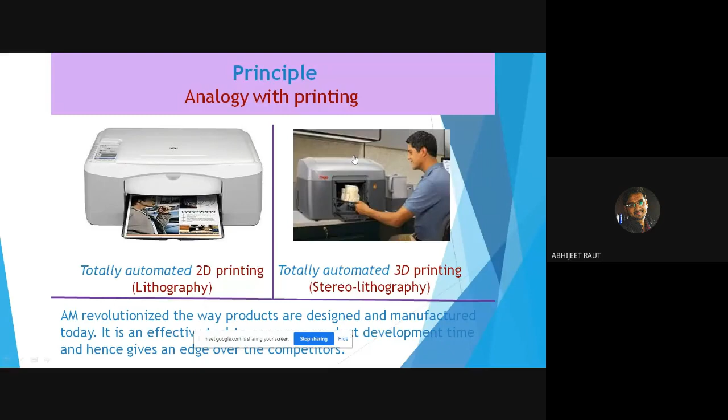But in 3D printing, we create the geometry in three dimensions. Hopefully you have seen a 3D movie in theaters. So we create the geometry in three-dimensional form on computer, same as in 2D printing, and there are machines like this printer which give the output in three-dimensional form. That's the analogy; that's why it is known as a 3D printer. A 2D printer gives output in 2D form, and this in three-dimensional form. In layman's language, that is the distinction.

3D printing or additive manufacturing has various names which you should know, because most of the faculty are from academia and research. If you are referring to papers or articles, you should know the alternative names so that you can confirm it is the relevant article. It is known as rapid prototyping, stereolithography, 3D printing, additive manufacturing, layered manufacturing, solid freeform fabrication, and direct digital manufacturing.

Initially, it was known as rapid prototyping. But compared to conventional machines like a CNC lathe, it is not rapid; it is a slower process. That is a disadvantage of it. That's why nowadays it is universally known as additive manufacturing, because the principle works in an additive fashion. I'll discuss that. Remember, it is nowadays known as additive manufacturing, but you should also know the other names.

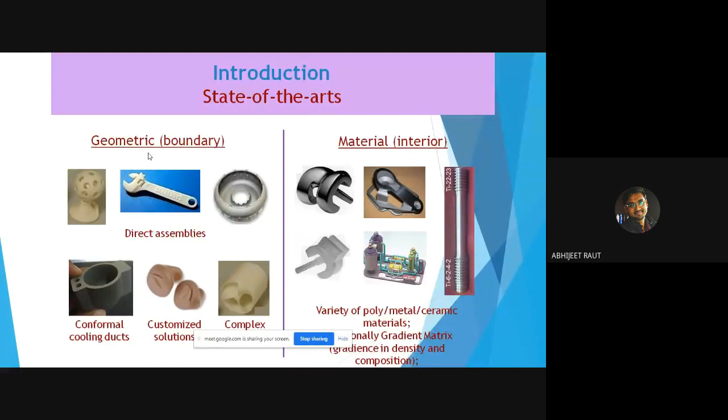First, geometric, means very complex shapes we can develop. Complex shape constraints were there, material constraints were there, and wastage was one of the constraints, right? But with the help of 3D printing, we have overcome them. Like wooden carpentry, there are CNC lathes, if you are aware, for metal parts. Those all are subtractive manufacturing. And that era has turned from subtractive manufacturing to additive manufacturing.

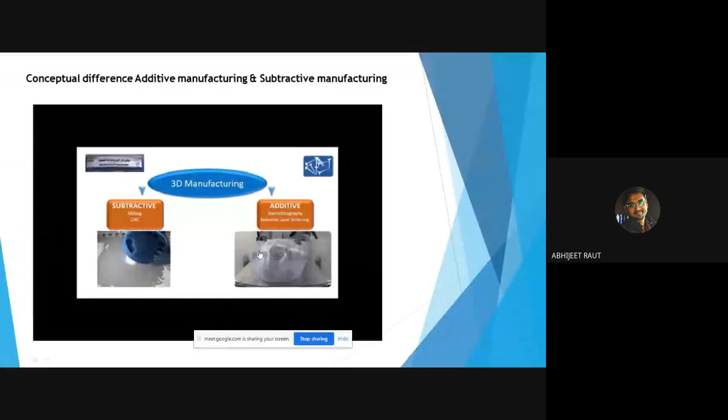Okay. So conceptually, you can see this. This is subtractive manufacturing. This is milling. You can see here, this is additive manufacturing. Layer by layer, material is being added, and here we are subtracting the material. Okay, this is the conceptual difference between subtractive manufacturing and additive manufacturing.

Subtractive manufacturing: CNC, lathe, milling, and even carpentry. Those are conventional manufacturing processes, right? With wooden material or metal, we can manufacture the product, right? This is the difference between additive and subtractive manufacturing, and the disadvantages, advantages and constraints we discussed in the earlier slide. Okay, so this is the conceptual difference.

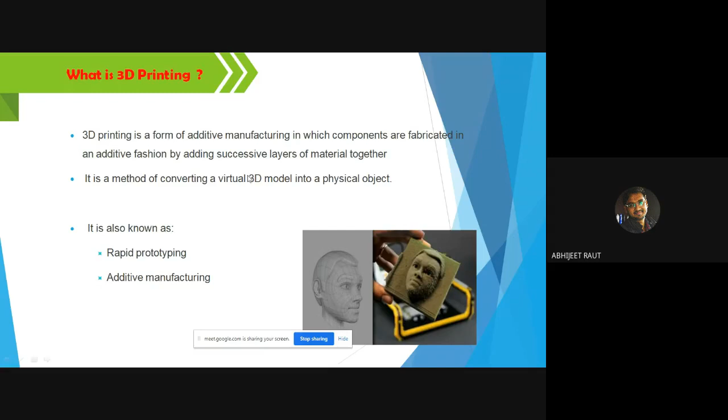And now what is 3D printing? Simple. 3D printing, as I told you, we create the virtual model and then we get the physical object. Additive manufacturing is nothing but the conversion of a virtual thing into a 3D physical object, simply virtual to physical in layer by layer fashion, like this.

Simple. First, we will create the CAD model, computer aided design model. And in this fashion, focus here, layer by layer, that geometry will be created in that machine, in additive fashion. That's why it is known as additive manufacturing, to get the desired shape.

One example: if you have seen any building infrastructure development, from the foundation, the floor, a single layer of brick, another layer of brick, till the ceiling, layer by layer, that is how we build that wall, right? Layer by layer. In the same fashion, this 3D printing works, right? In additive manufacturing,

layer by layer. And another thing I would like to tell you at this point itself: have you seen any jalebi making process? The jalebi making process or softy, that is called the extrusion process.

Extrusion, that type of nozzles are there. Those nozzles are adding the material layer by layer. Got it? I'm going to show that video of operation, but still at that point I'm telling you: layer by layer we are adding the material.

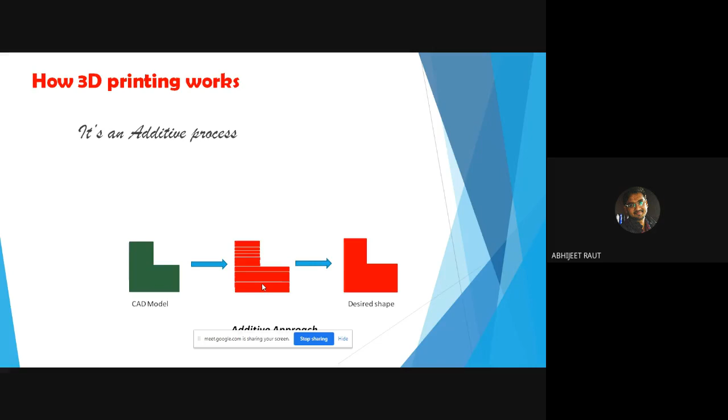So what is the workflow? What are the essential things that will be required for 3D printing? So don't worry that you don't have a 3D printer or you don't have a raw material, all those things. This is the digital era. Everyone is having computers, right? Computers, laptops, even cell phones. So forget if you don't have the 3D printer.

If you have a computer, you can outsource the 3D printing facility from any college or institute. But at least you should be aware which 3D printer is useful for you, which raw material is useful for you. That's why I have compiled the session in that way. So you require a printer, but don't worry. If your institute is having a 3D printer, no issue. Raw material and softwares. Which are the softwares? I'm going to tell you, which you can easily access.

So this is the workflow of 3D printing. As I told you, the conversion of virtual to physical. So what is the first step? We will create the CAD model. It is a virtual geometry in computer, whatever it may be. It is a brain, any pen, pencil, whatever the product. We need to create it virtually first. That is the first 3D CAD model, right?

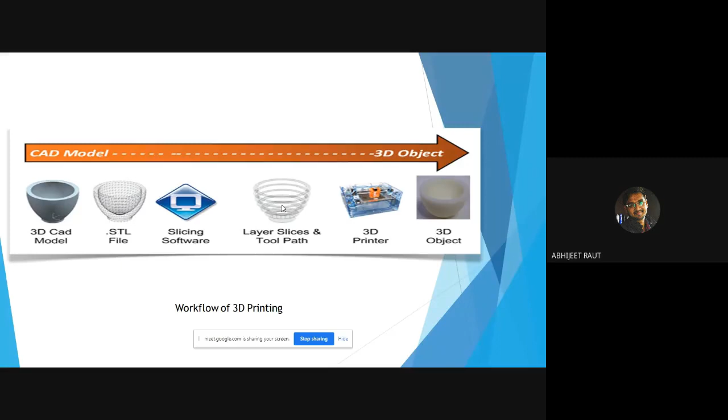Okay. So first step, we will discuss each step. 3D CAD modeling. We are not engineers, we are not from an engineering background. Some biotech people may feel, sir, we are not from an engineering background, how will we create the geometries? Don't worry about it, I'm there. Remember, CAD stands for computer aided design. CAD is used in every discipline: engineering, interior, architecture, and even in medical and allied fields.

Right now, I'm going to share engineering CAD with you. If you're creating any geometry, developing anything, what is required? Dimensions, right? If you have the dimensions, you can easily create that geometry on the computer with the help of engineering CAD software. Like if you require combs for tissue culture or a customized pot, you need the dimensions: length, breadth. With those inputs, you can easily create it with engineering CAD.

Now, maybe a question from the audience: sir, we are not from the engineering domain. Will that software be expensive? How can we access it? My dear friends, these engineering softwares nowadays are being used by kids. Yes, kids. If your child is in a CBSE school, there is an Atal Tinkering Lab, an initiative by Niti Aayog. They have created a Fab Lab like culture with a 3D printer, and those kids are using engineering CAD.

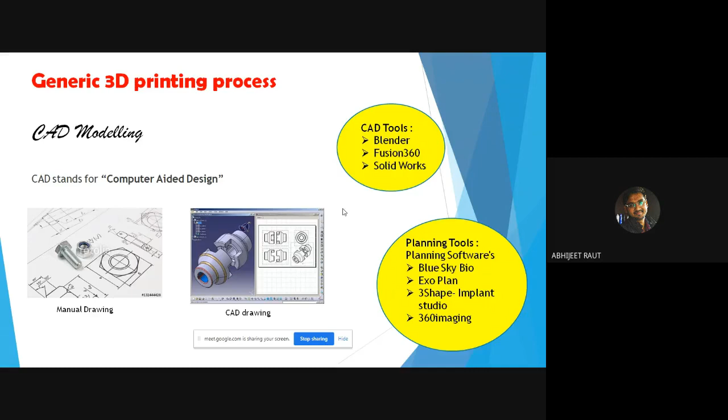So the same thing I told you for biomedical CAD modeling. What is required? We require input from a CT scan or MRI. That file is a DICOM file, .dcm. In engineering, we get the input file in various formats. Like from Creo, we get the input in part file, CAT file, like that, right? Similarly, here the format will be .dcm, DICOM file from CT scan and MRI, and that DICOM file we give to software which converts it directly into STL, which is the input for 3D printing, right?

So there are various softwares, you can note it down. 3D Slicer, InVesalius. These are open source software you can use to convert those CT scan or MRI files into STL format, right? There are softwares Mimics and 3-matic, but these are paid. So simple. We can easily convert that CT scan file into an STL file, and then directly give it to additive manufacturing after a little work on the slicer, right?

If there is a mesh, like we are exposing other tissues as well, there are various softwares to edit that CT scan. Because most of the time, if you are taking a CT of the mandible or any anatomical part, there is hard tissue and soft tissue. So when we are exposing, those pixels come into the picture, and it takes the picture of other soft tissues as well. So there are editing tools, and you can edit the geometry: Meshmixer and Netfabb. These are also open source software which you can use.

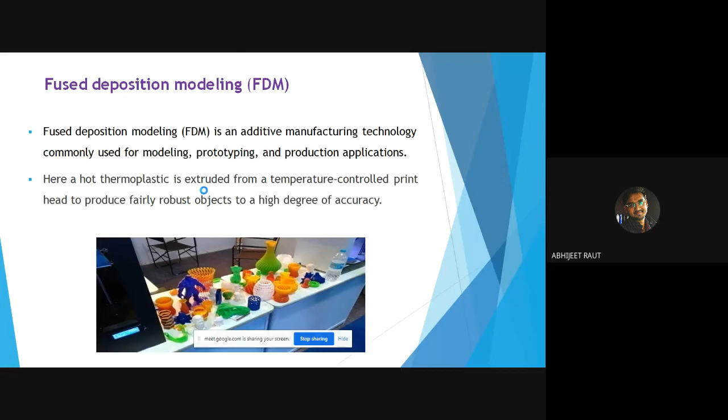Hello. Yeah. So fused deposition modeling. As I told you, it is similar to a glue gun and welding rod. Okay, I'll directly show the video. That will be better. Yes, see this. Observe this video. First step.

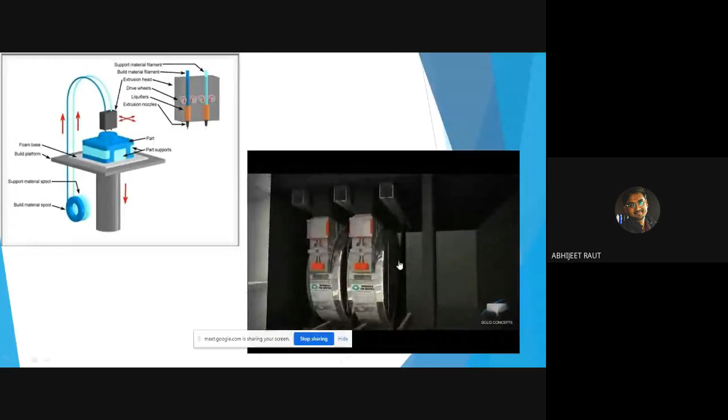Is it audible, sir? Abhijit, sir? ...is then transferred to a machine, which constructs the part layer by layer on a build platform. Sir, the volume is very low. It is audible. Okay.

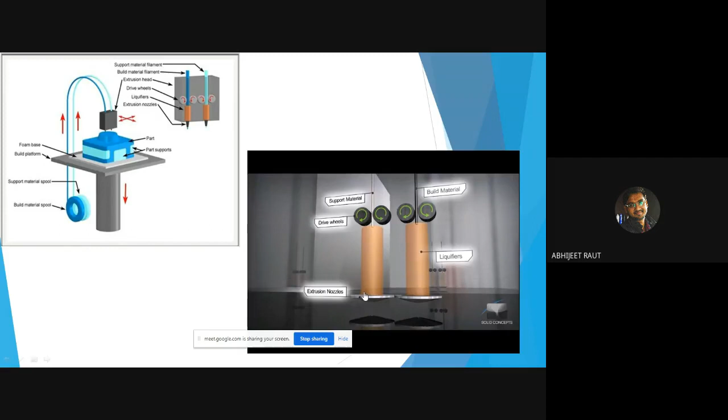I'll explain that video also. As I told you, the material will be at the bottom or at the back of the machine in spool form. A spool, like when you play with kites on Makar Sankranti. There will be two nozzles: one for the main material and one for the support material.

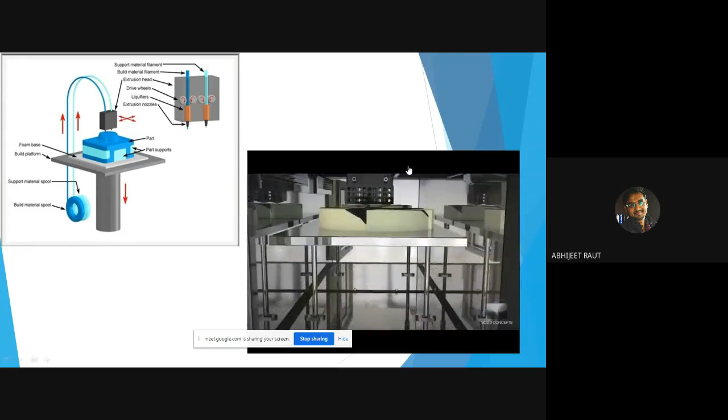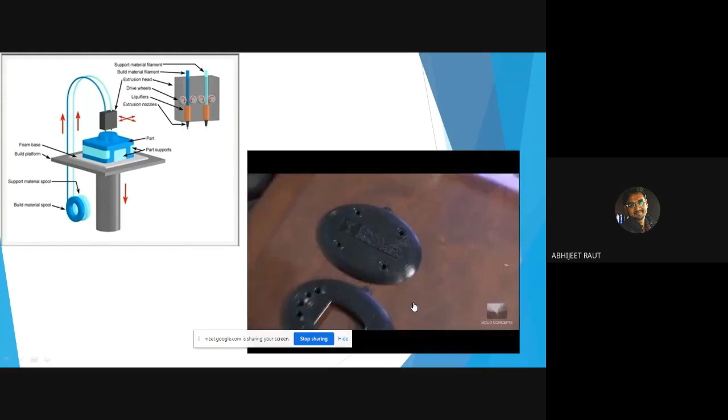Now, what is the requirement of the support material? Like the example I told you of building a wall: for overhanging things like the ceiling, we require scaffolding. Here also, for overhanging things, we require support material. For that, there is another extruder, or nozzle. And that support material we can remove by hand, or with the help of a solvent. We can dip it in a solvent, and due to its chemical properties it will dissolve in that particular solvent.

Okay, got the idea? Simple. There will be a spool with the filament. It is known as filament. Various thermoplastic filaments are available. Those will be at the bottom or back of the 3D printer. You can focus on the cursor. I'm giving a brief about it because FDM is relevant to bio 3D printing. So the concept is important here. That's why I'm telling you.

The spool will be there, and then there will be the liquefier. If you remember the video, there is a liquefier where we can set the temperature according to the material. It liquefies, and layer by layer it adds the material. In that way we get the desired shape. Support material, main material.

There are single nozzle machines and also multi-nozzle machines. So if you would like to create a composite, a blend of different types of materials, we can add them, and the same phenomenon is used in bio 3D printing as well. Hope you understood.

So generally in FDM 3D printing, we can use various types of thermoplastic: ABS, PLA, TPU, nylon, PET, and depending on the material being used, there will be a temperature capability. There will also be a work volume.

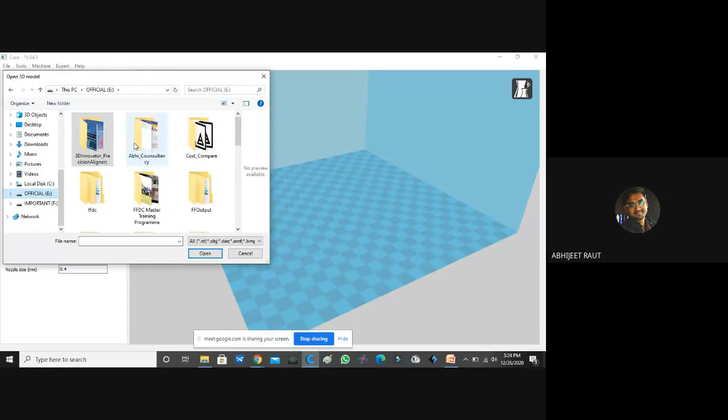Like here, I have taken this STL. Is it visible? Yes, sir, it is visible. Yeah.

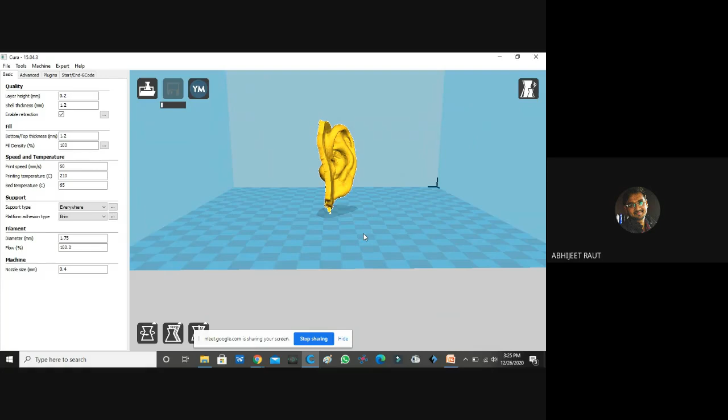This was one of the case files which I have done for the VSPM Dental College, which I'm going to show in my presentation as well. But at this moment, I'm sharing this with you. One girl visited that VSPM Dental College. She is having an ear like this.

Is it visible? See this. This one ear is defective, right? The other ear was good. Generally, this case comes under prosthesis. The prosthetic department is under dentistry, so it comes under prosthesis. So Dr. Vijeta contacted me from VSPM College for this.

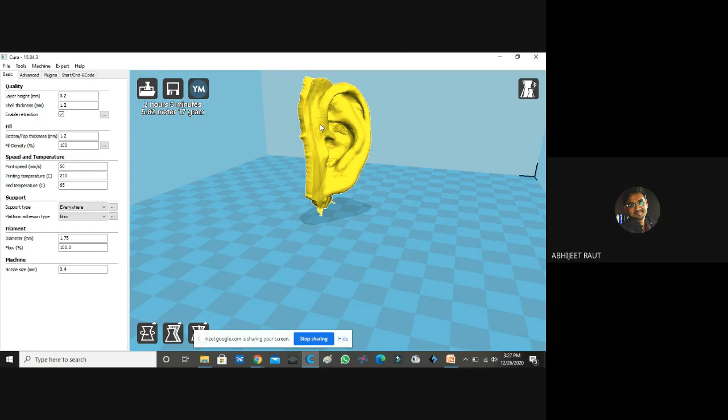The donor was not available for her to transplant the ear, or even for the casting purpose. Then, as I told you, one of the inputs for the CAD is the dimension, but no engineering expert can create this geometry with engineering software. So we can create this geometry with a CT scan of the ear, or from extraoral 3D scanning. We get the CAD file, and then we imported that STL here for the 3D printer.

You can see this. This is the volume, or build size. Any 3D printer will have a build size. I'll show you that. Like this build size: width, depth, and height. Like here we have 220, 220, and height is 250 mm. Got it?

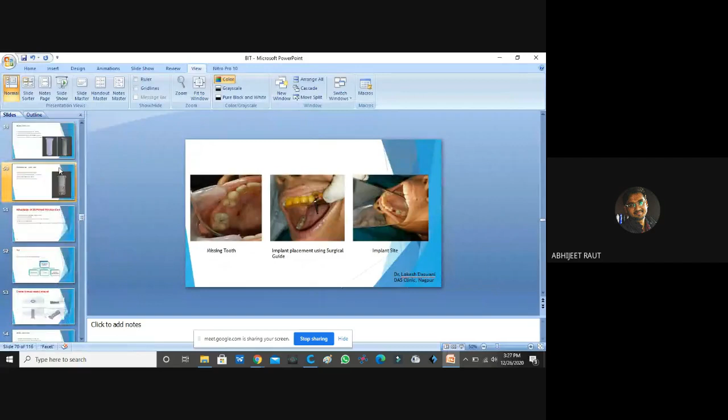Okay, then here in slicing software, let me tell you, one of the drawbacks of 3D printing is that it is a slower process. As per complex shapes and material requirements, it takes more time. That's why the initial name rapid prototyping is not properly used. It is known as additive manufacturing now, because it is not rapid. That is the constraint of 3D printing. So we need to give the proper orientation.

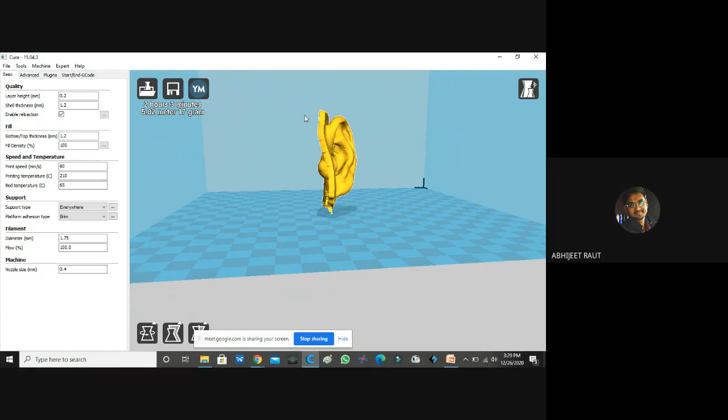I'm giving the example at this point about the modeling. We took the CT scan, the extraoral scan, of the good ear. Then we mirrored that ear and created the virtual geometry with the mirror command. We got the mirror image of the healthy ear, and we created it.

Okay, so here, if we print in this orientation, see the timing: 2 hours 3 minutes. If we select it and keep it like that, as I told you, every overhanging portion will take support material. That's why the optimized position is very important.

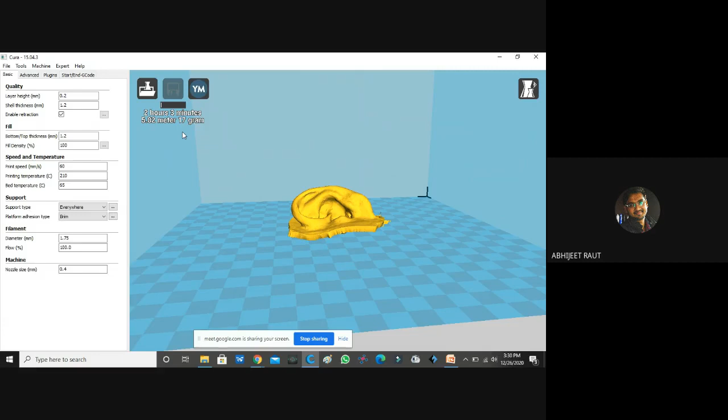Now see what the time and material consumption will be if we keep it like this. Remember, focus on this, 2 hours 3 minutes, and now at this orientation, what is the change in timing and material consumption? See the change. So as per the orientation, material consumption changed and timing also changed.

Even with the layer height, take the example of a brick. If the brick height is less, more bricks are going to be consumed. Same here. You can change the layer height from 200 microns to 300 microns, meaning 0.3 mm. This is in FDM. Now see the change.

You can even keep it hollow. Now you can see fill density. If you have a strength requirement, you can keep it 100%. If only prototyping is important, you can keep it less. Fill density means you can keep it porous or hollow. Now see the change in timing. Then we will move ahead.

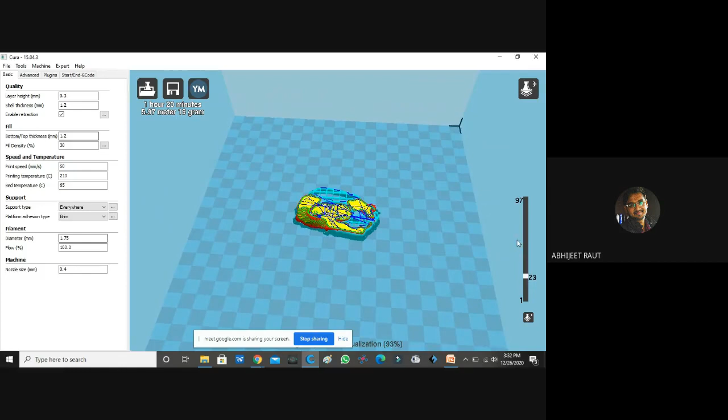See the change in material and timing. So in that fashion, we are doing the slicing. So as per your requirement, if you only need it for your teaching purpose, you will keep it as a hollow or raw finishing. Okay, you can see the layers, how it is going to print. Top. Initially, layer by layer, the material is going to be added in this geometry in that fashion.

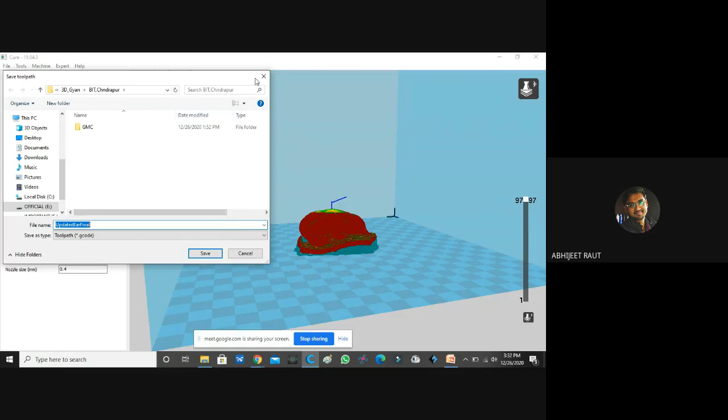Got it? And after the optimization on all those inputs, directly you need to save this tool path as a G code. See this G code. So don't panic that I don't know G code, I don't know programming. The software itself saves it as a G code or instruction. Got it? Good. So that was a slicing software.

Okay. There's much more in this also, but due to time limitation, I can't explain this. A detailed 1 hour session can be conducted on the slicing software. Just for the briefing I'm telling you, to get a little idea.

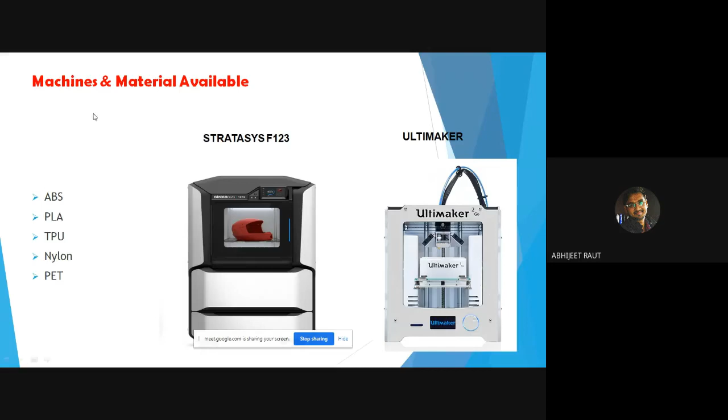So these are the various FDM 3D printers available for thermoplastic material. Remember, FDM 3D printing has a certain constraint: it has low surface finish. If you want it for prototyping purposes only, then you can go for it. For prototyping, if you need to show any educational model for your product, you can use it. But whenever minute accuracy is needed, you can't use this. Below 50 microns you can't go.

And as you need to remove the support material, there are various irregularities and scratches on the product, so finishing is not proper. But my dear friend, it is the cheapest 3D printing among all the 3D printing technologies. That's why it is widely used in institutions. Okay, why is it cheapest? You can compare in the next slides.

Because other 3D printing has more technology. Here a simple extrusion process is there in FDM, as I told you, like a glue gun or welding, like the jalebi making process, right? But in other 3D printing processes like SLA or DLP, a laser is used. That's why it is costlier. Okay, so this was about FDM.

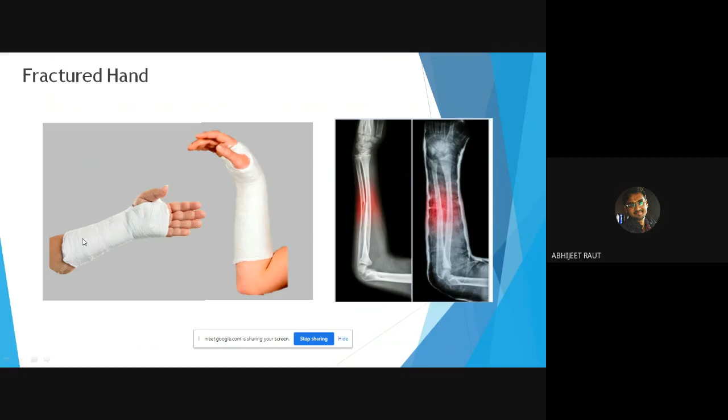These are some of the case studies and work done by us. One simple case study was a fracture case. Usually what we do for a fracture is a conventional plaster. What is the problem with plaster? There is no proper ventilation or air. That's why there are various issues with it. If anybody has fallen or experienced an accident, they can tell us that there is a smell, or itching also, right? Those are the constraints of the conventional plaster.

But with the help of 3D printing, see this, we have created this plaster with ABS plastic. This is a ventilated plaster, and where there is a fracture, we have increased the shells and meshing to give proper exposure. This is a properly ventilated plaster we have tried for one orthopedic case.

Here, for the hand, an exactly customizable thing is required, so we can take a 3D scan or CT scan, or even manual measurements of that hand, and then simply create it virtually on any engineering software with meshing, and then we get the output. Simple, portable, looks stylish, and the cast is washable as well, and the itching and smelling problems can be reduced. That is one simple case we have done.

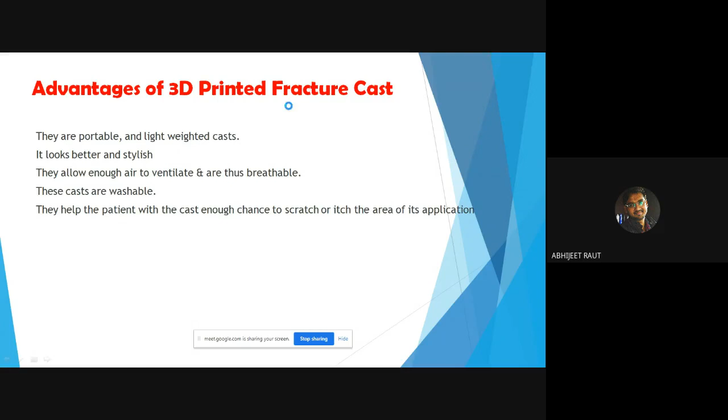Another for medical, we have done mock surgeries. Mock surgery or surgical planning is widely used in every domain, right? Even in bigger industry, they create prototypes. What is a small machine prototype? It is a scale model of the actual product, right? In your domain also, surgeons are using it for surgical planning.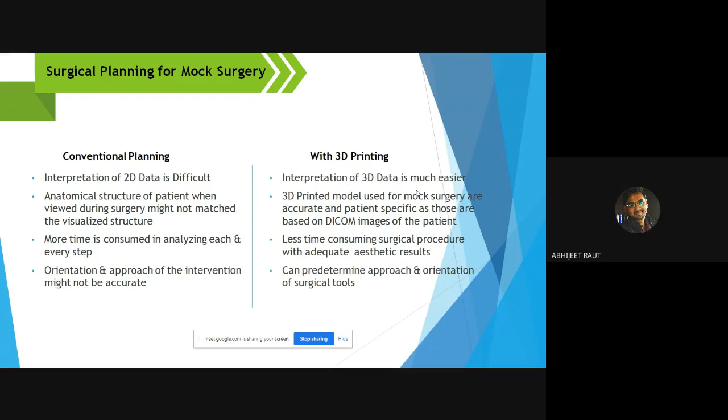Conventionally, they only used X-rays and 2D drawings, and the interpretation was not good in that 2D conventional planning form. But with 3D printing, those things are tangible. You can directly feel the geometry or anatomy of that patient, right? That's why it is used in surgical planning. Some of the cases I would like to share with you.

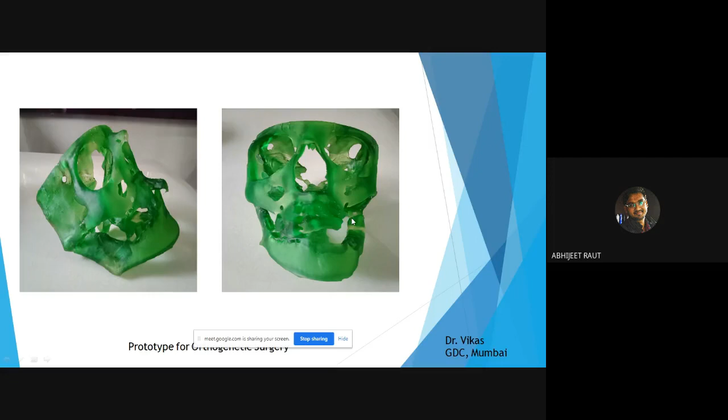For root canal, there is an endodontist. There is a prosthodontist for implant-related things. Maxillofacial is for facial-related things, bone-related things. Various fields are there, even plastic surgery. Okay, so for one of the doctors, Dr. Vikas from GDC Mumbai, I have done surgical planning.

Even the artificial arm, the Jaipur foot, you are aware, those are not developed with 3D printing, but the prosthetic limb is popular these days. Earlier, that was handled by threads. Now, we are using sensors. So artificial limbs are very useful for the disabled, right?

Even in Corona, when there was a strict national lockdown, we created face shields. Face shields, hope you are aware. We created and donated face shields in various regions. I have also done one case for IGMC, Mayo, if you are aware. We developed the splitter and restrictor. That initiative, my work, was appreciated by HRD Minister Dr. Ramesh Pokhriyal.

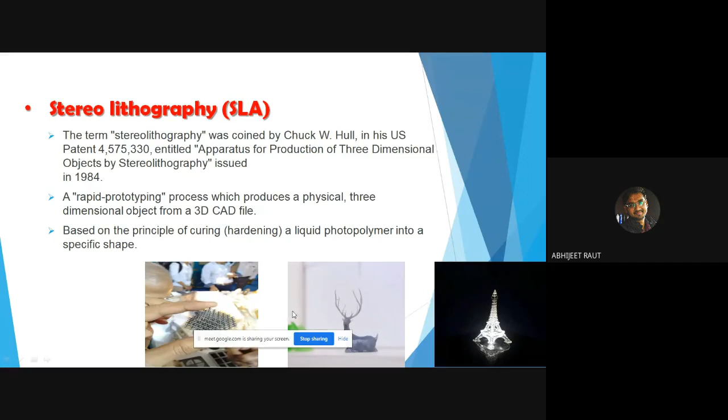Here, the raw material is in liquid form: simple resin, photopolymer. You can see those example images. So directly I'm showing the video. There will be a container, or tank, filled with the photopolymer. Whenever light is incident on photopolymer, it will be cured. That is a property of photopolymer. So for high accuracy like this, we require SLA.

First step, we need to create the CAD model, then the slicer. The slicer will give the output G-code. This is one type of SLA. This is the tank which will have the liquid resin. You can see the laser is incident from the top of the 3D printer. See here, there is a mirror deviating that laser onto the resin according to the geometry we created virtually, and wherever it is incident, that resin will be hardened or cured.

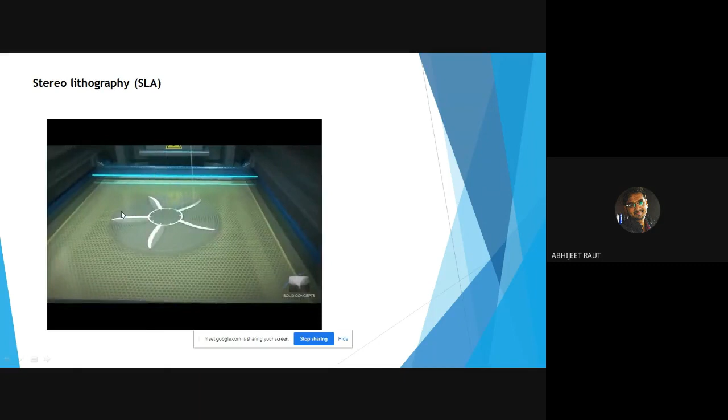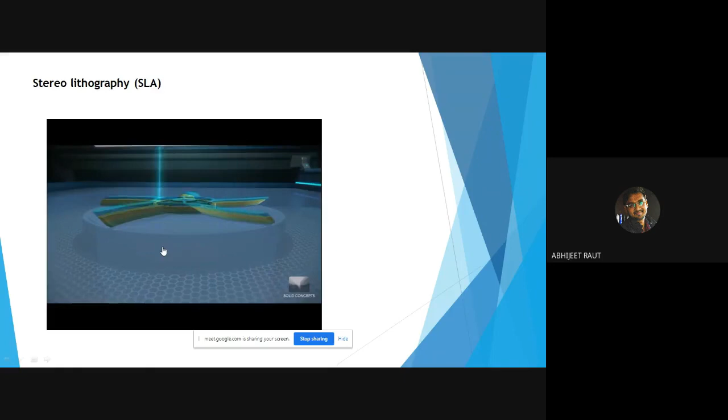You can see. It goes down layer by layer. The laser continues to trace and fill each layer, building from the bottom up. In this way, we get the final object, the complete part. Same as FDM, here also we can dip it into a solvent and remove the support material by hand.

This was SLA. It gives highly accurate output, but as a laser is used in this technique, it is a little more costly, you can say 3 times more than FDM. As I told you, in FDM we can use various thermoplastics from third-party companies as well. But in resins, there are standard clear resin, flexible resin, castable resin, tough resin. Accordingly, there are various categories of resin, photopolymer.

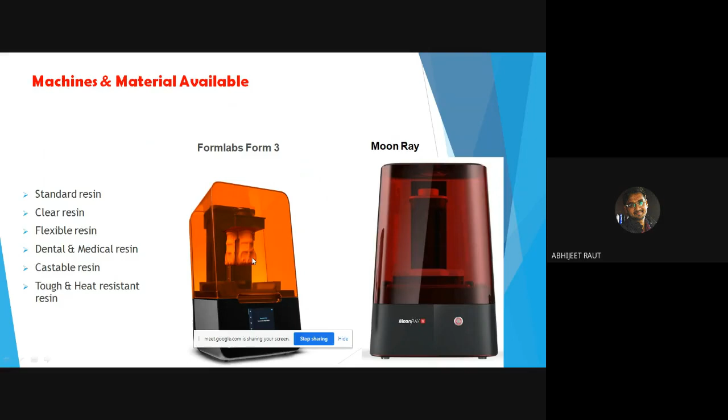These are some popular 3D printers. Various 3D printers are available. These popular ones are used in the medical industry: Formlabs, Moonray. So now the case studies. As I have shown you the examples I have done with FDM, now I'm going to discuss the things which I have done with SLA. Surgical guide.

If anyone has undergone the root canal process or extraction process, right? You see the dentist has a drill, right? They drill in our gums, that bone, and then they do the further surgery. But in more complex situations, it's all assumptions. If that surgeon or dentist is experienced, then it is okay, or else there is a risk, right?

So there are the surgical guides. We have done the surgical guides for proper orientation and proper placement, for predictable and good productive results. Accuracy will be there, so obviously productivity will be better. I'm not discussing those things in detail, just in a simple manner I have told you. So these are the surgical guides we can create with the help of a 3D printer, customized according to the patient.

See this. This was one of the cases I have done for Dr. Lokesh Daswani, Das Clinic. That patient had one tooth missing. So we need to do the implant. Implant means what? Artificial tooth. For that, the drill is important. So we have taken the CT scan of that patient, then we created the geometry of that guide, and we have 3D printed it.

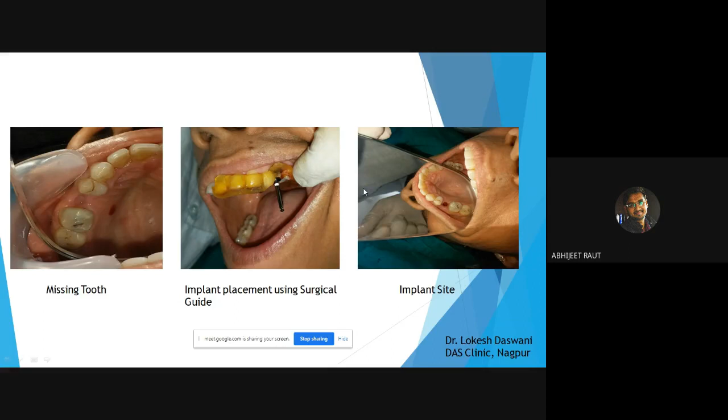And then we have done the placement drill over here. You can see this, the drill implant site. You can see the X-ray also in the next position. See this proper drill, and then the implant done. Final placement. Got it? This is a boon to prosthodontistry. Very useful for the newcomers.

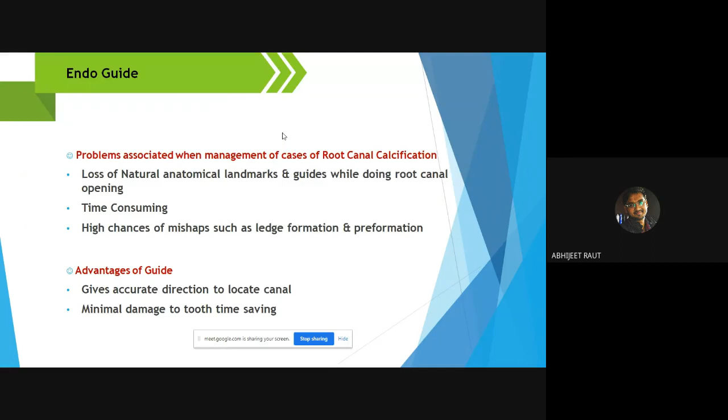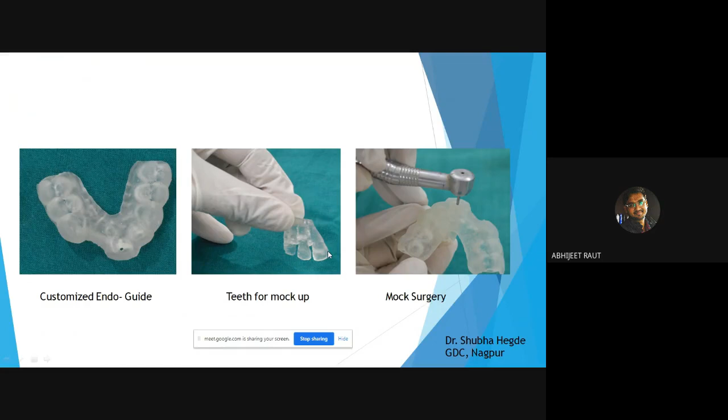Then I have done one case with GDC Nagpur as well, in endodontistry. Root canal everyone is aware of, but whenever there is a calcified complex canal, the root canal is very difficult. So one of the dentists, Dr. Shubha Hegde, approached me for this endo guide for a patient from Gadchiroli. So we have created a stent, you can say an endo guide. We have done the mock surgery, and then we placed it in the patient. You can see the patient image as well. This is used in endodontistry.

Even the temporary teeth, those temporary crowns and bridges, are developed with the help of 3D printing. In maxillofacial orthodontistry, orthodontistry deals with the smile, you can say. You have seen these brackets and wires? Whenever there is a gap, or not a proper orientation of your teeth, your smile is not good, right? At that time, you visit the orthodontist, and with the help of those wires, they fix your teeth. But does it look good? No, it does not look good.

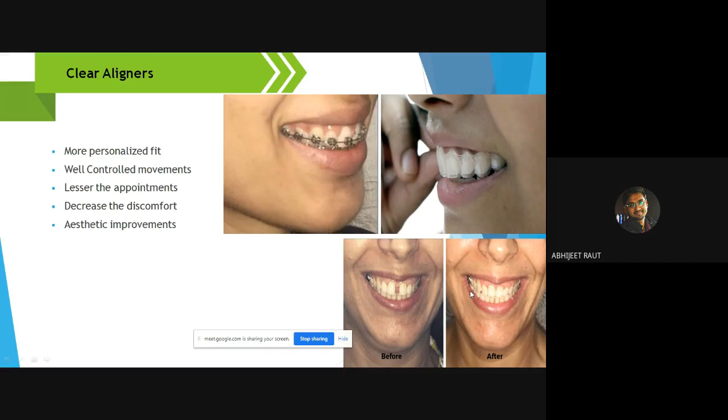That's why, with the help of 3D printing, there are clear aligners. With clear aligners, it is a totally invisible treatment. It is not visible to others even when you are undergoing this treatment. Clear aligners are not visible, and you can correct the teeth with them. We have done that. Clear aligners.

As I told you about SLA, stereolithography. What happens in SLA? From the top, the laser is incident on the vat of photopolymer, and that resin is cured to get the desired object. Similarly, there is another 3D printing process, digital light processing, DLP. There, the laser is incident from the top. Here, the projector will be at the bottom. The projector projects the image of the first layer onto the photopolymer, and we get the first layer. Compared to SLA, where the laser is acting in the process,

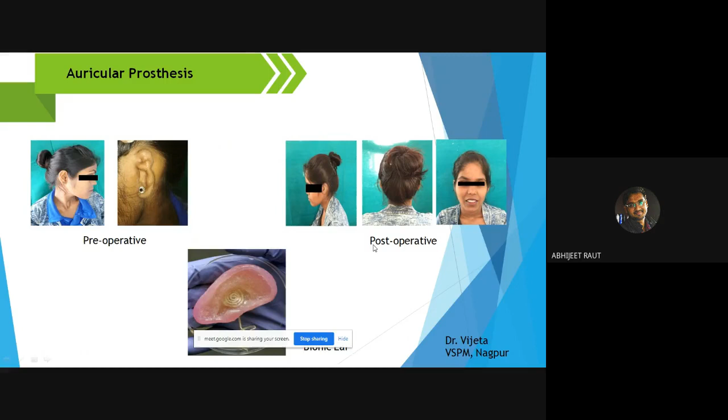Dr. Vijeta approached me for this, so I have done this case for Dr. Vijeta and Dr. Sai Deshpande, VSPM. I have done the same case for Dr. Tulsi ma'am from GDC as well, plastic surgery department.

Okay, then digital denture, artificial denture, which you have seen. Next, now this was related to plastic, but you have seen that all things can't be developed with the help of plastic, right? So you have seen various implants, knee implants, hip implants, dental implants. Those are developed with the help of titanium, right? Titanium material or any metallic SS, medical grade.

So for that, what you can do here, if you have the object, you can do the post-processing. If you have ever heard about the casting, so we can treat it as it is as a pattern.

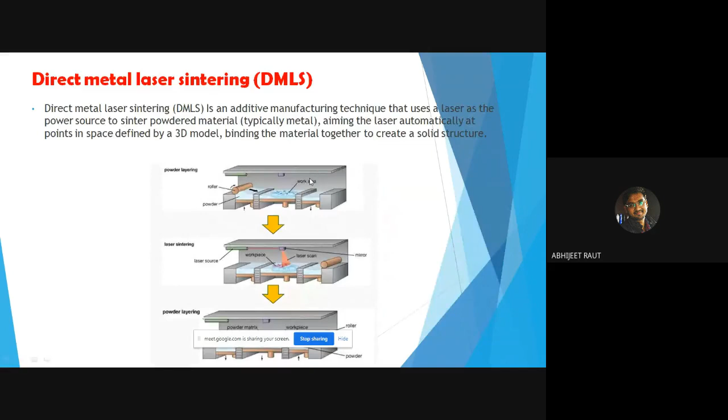The laser will incident from the top, and as the laser incident on that powder, those crystals will be fused together to give the desired shape. This happened in where? In DMLS. Got it? So this happened in DMLS, direct metal laser sintering. This gives the directly metal 3D printed part.

So these are some of the pools of materials being used, and these are the giant metal 3D printers. So I told you both phases for the metal output part. You can do the casting or you can do the direct metal printing. These are the popular 3D printers, internationally renowned, Renishaw, 3D Systems.

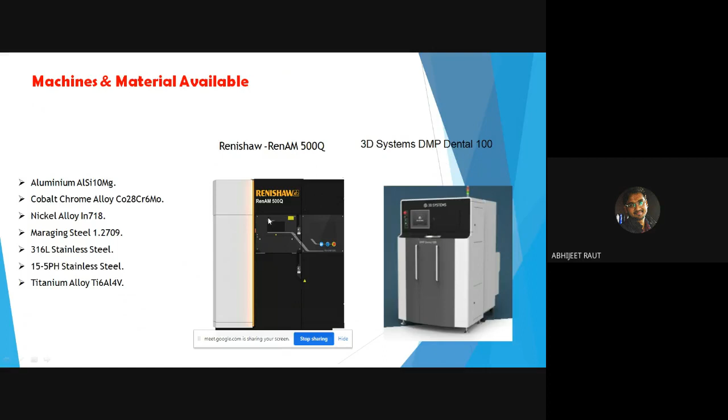Reconstruction. Can I take a 2-minute break? Just 2 minutes. Charging issue. So if there are any queries, the attendees are requested to unmute yourself and ask your queries, or you can also type in your queries in the chat box. Hello, am I audible? If somebody will please confirm if I am audible. Yes, sir. Oh yes, thank you, ma'am. All the attendees are requested to please stay connected. Hello, am I audible? Yes, you are audible, sir. Okay.

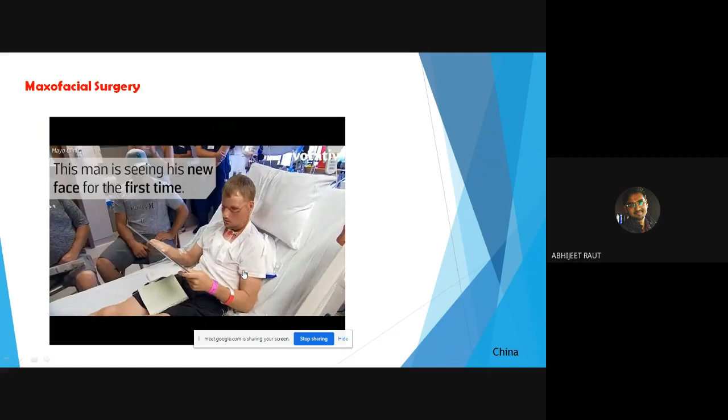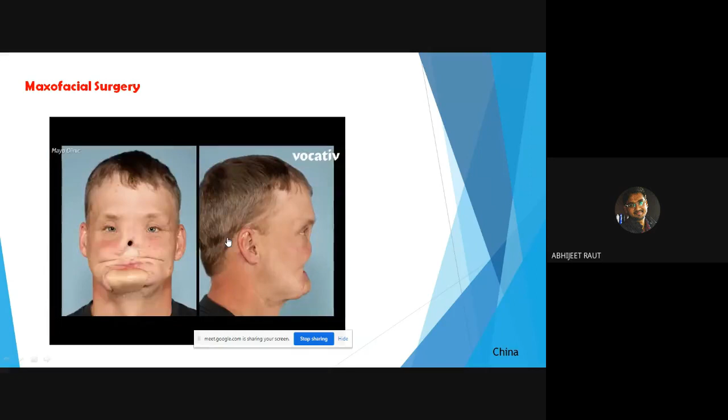You can see the face of that patient, that person is very defective and healed with the help of 3D printing. Single nose, two teeth, very ugly look. It's healed with the help of 3D printing. See the transformation.

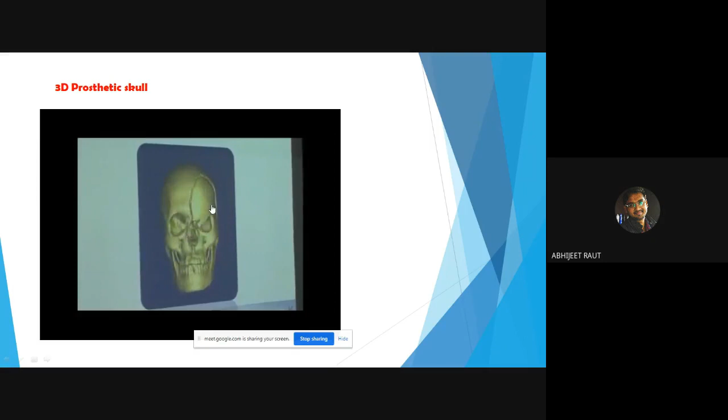Similar case study. I would like to tell you about the same, a skull. This is a case study from China, but in India, Chandigarh has also done the same study. Even now everywhere, even Mumbai, they have done this type of surgery. This is a titanium mesh. 3.5 hour operation on August 28th.

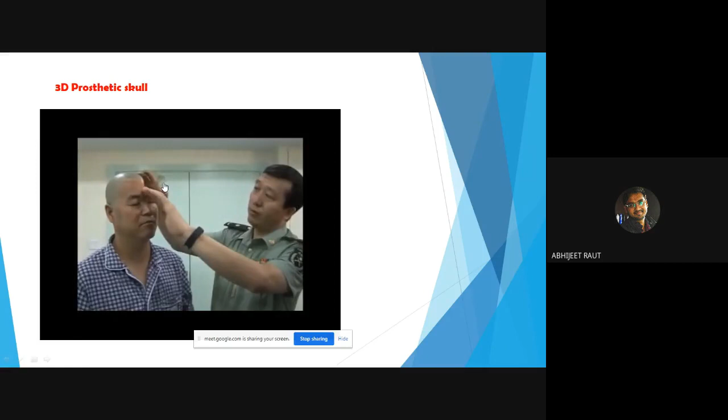Doctors first separated the scalp from the skull and pulled off some of the muscle. They then inserted the titanium mesh, which weighs 7.2 grams, to replace the damaged part of his skull. After more than 2 weeks... So in that fashion, that neuro-related problem is being solved with the help of metal 3D printing, right?

Even in orthopedic, if you have heard about the slip discs, bulging of discs, even the thinning of the pulposus, which is in between the vertebrae. So those can be developed with the help of flexible type of metal 3D printing. Even for surgical prototyping, orthopedics are using those.

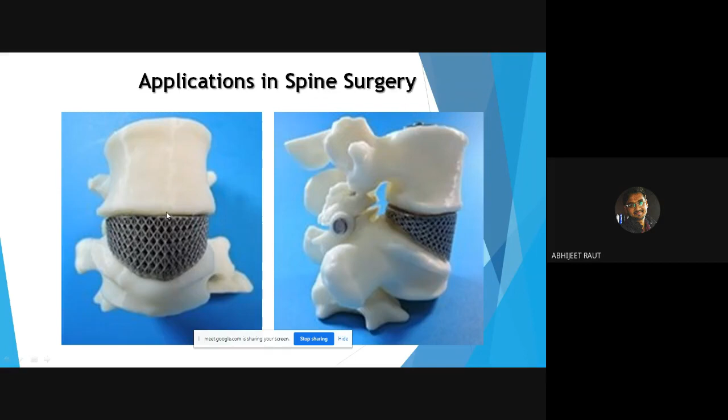Even in your biotechnology, any type of broken lab equipment, usually in the medical or medical allied fraternity, we are dependent on Korean or Japanese equipment, or you can say imported things, right? But at the same time,

Hello, Abhijeet sir, are you there? Hello, Abhijeet Raut sir, I think you are not audible. Okay, the attendees are requested to stay connected with us. I think there is some technical difficulty because of which we could not hear our resource person, and I am sure that he will join us back, and then we will continue with the session. Until then, I'll get in touch with him. Please stay connected. It won't take long.

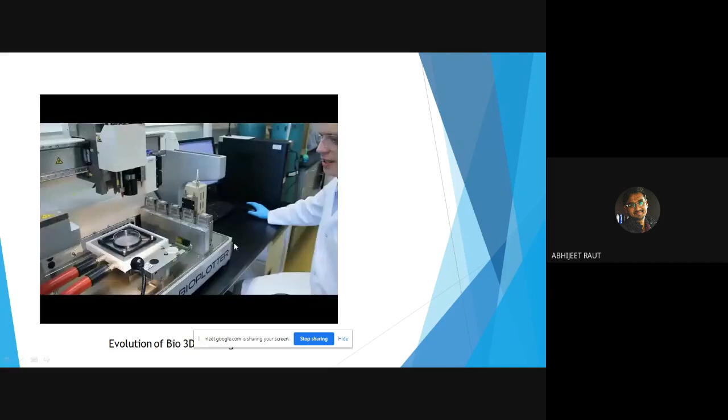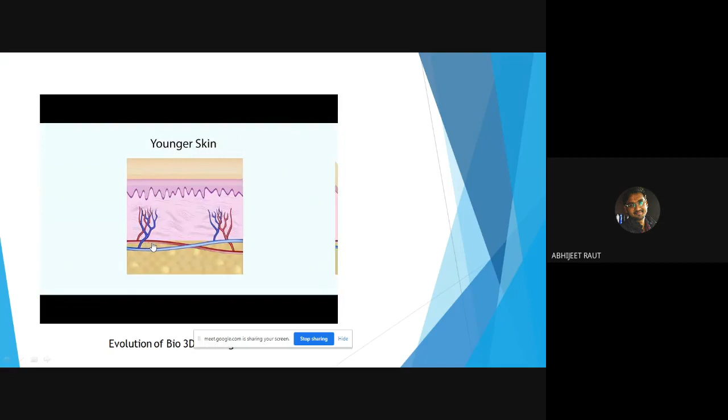We are looking at the use of 3D printing to shape scaffolds for tissue regeneration and regenerative medicine. The ultimate goal of 3D bioprinting is to be able to print functional organs on demand. So the bioplotter for us is a tool to help us do our research. So this research addresses all medical conditions where we deal with tissue loss. Tissue loss can be associated with aging, trauma, or disease.

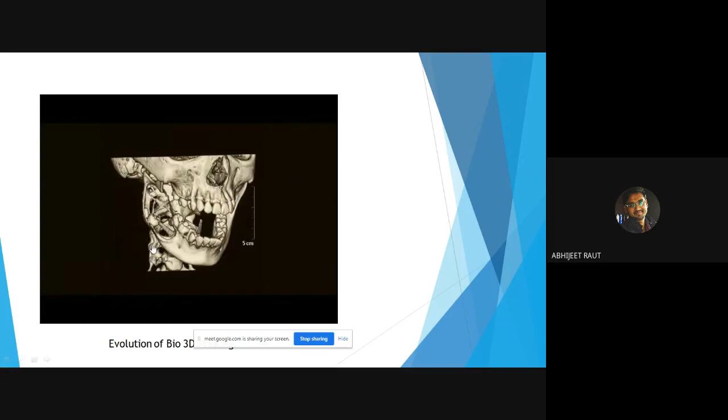An example for disease would be when you lose a whole section of your bone due to bone cancer. That piece of bone has to be cut out. So the idea would be to try and help the body regenerate that missing piece of bone, hopefully minus the cancer. With the precision of the EnvisionTEC bioplotter, we can actually reproducibly print composite structures. So we're looking at generating healthy cartilage and healthy bone in both young patients and aged adults.

Millions of people have problems with their knees and joints. So being able to refurbish the joint and some of the delicate structures within a joint would be another application. The one nice aspect of using the EnvisionTEC printer is the community.

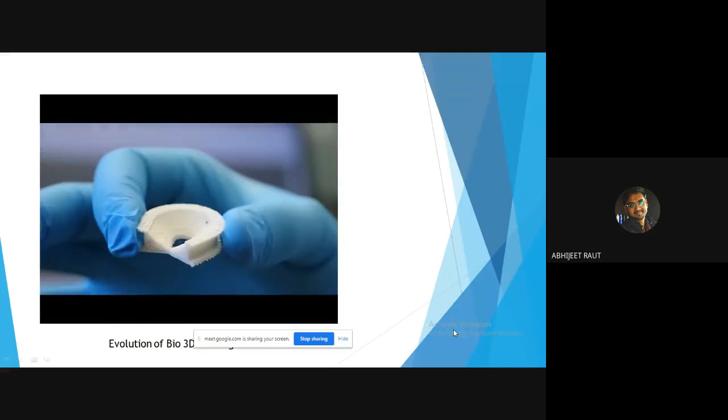So in that fashion, you can create it. Okay, this is just an introduction. So simple. Fiction meets reality with the help of the bio 3D printer. It is similar to an FDM 3D printer. Okay, as I told you, extrusion, inkjet. Those tanks will be like an inkjet 3D printer. There will be a container, or you can say a tank, upside.

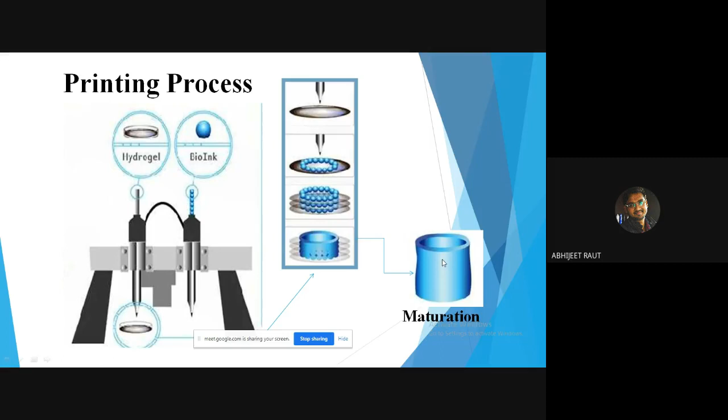It will have two compartments, which will have the bio ink cells or a hydrogel. And this is a bio 3D printer, hydrogel and bio ink. Okay, two nozzles, hydrogel, bio ink. And as I told you, layer by layer or drop by drop, it will put that droplet over there. And as you know, the tendency of cells is that after some time they will fuse together. They will fuse together to give the tissue, and with the help of that tissue, you will get the organ. Right? This is a short video. One minute.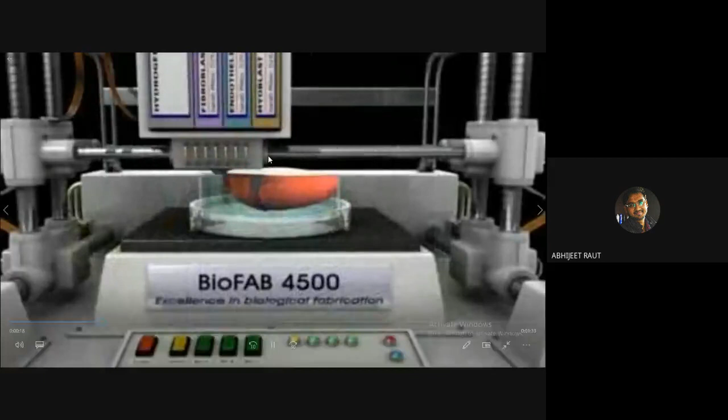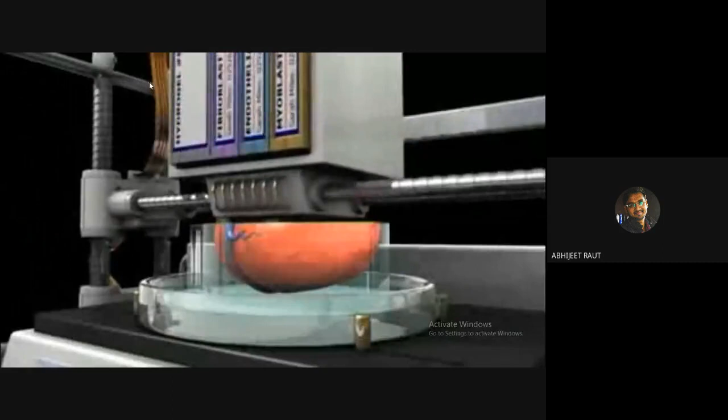Will be loaded with cartridges of living cells. These will then be output from a bioprint head that will move left and right, back and forth, and up and down in order to produce a 3D object. Bioprinters will output many types of cells as well as a dissolvable gel to support and protect the cells during printing. Organs will then be built up in a great many layers. Over several hours, a complete replacement kidney, liver, heart, or other body part will thereby be created.

A layer of biopaper gel. Bioink spheroids, each containing tens of thousands of cells, are then injected into this water-based material. More layers are subsequently added to build up the final object. Amazingly, nature then takes over and the bioink spheroids slowly fuse together. As this occurs, the biopaper dissolves away, leaving a final bioprinted body part.

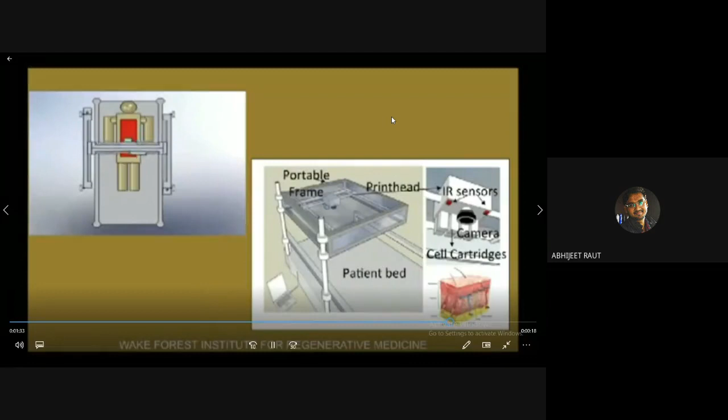Some future bioprinters are likely to add cells directly to the human body. Sometime next decade, doctors may therefore be able to scan these wounds and spray on layers of cells very rapidly. You can imagine the technology and research, the blend of tissue-like life science with engineering.

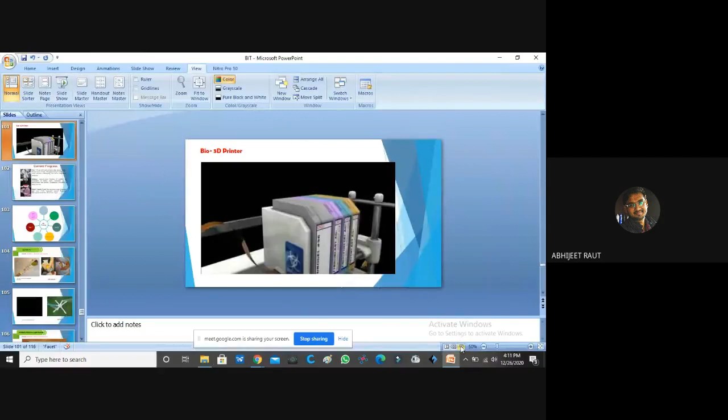Okay, so currently, as I told you, a bionic ear can be made with the help of 3D printing. Even functional kidneys are being made. There is research going on. Even blood cells, various finger prosthetic things I told you already. Even the heart, yes, an artificial heart that pumps is being developed in research. And even in India, in Hinduja Hospital, research is going on with the help of 3D printing.

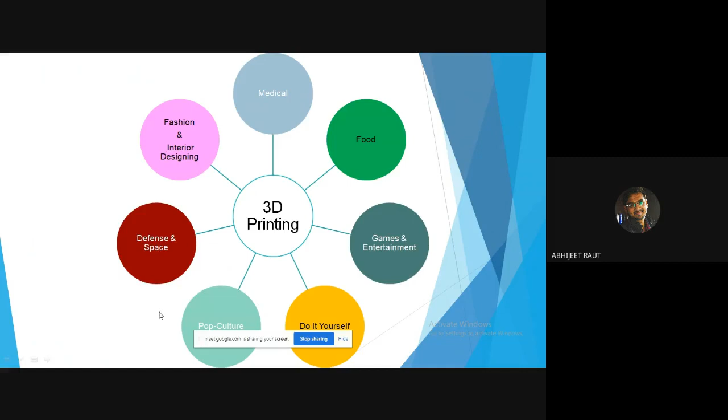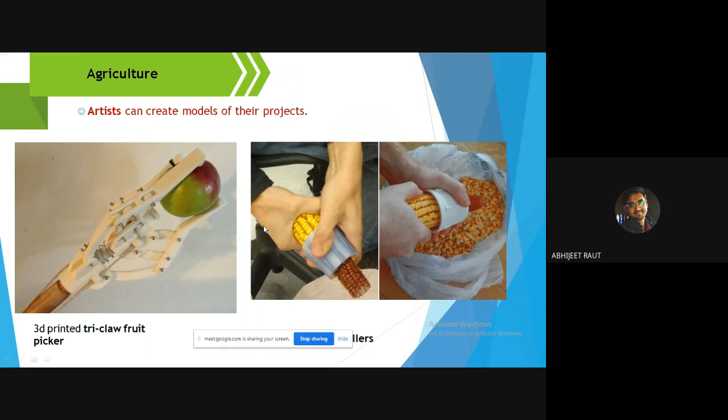Similarly, in other domains also 3D printing is being used, whether it is medical, food, games, defense, fashion and interior, right? So I'm going to give glimpses of those, as this is related to rural and tribal areas as well, one of your theme topics. So in agriculture, fruit pickers can be developed with the help of a 3D printer. Even this corn sheller. These customized small tools you can create in your area, no issue. This sprinkler you can make: if there is an irregular surface, the standard sprinkler can't be used, so you can customize and develop your own.

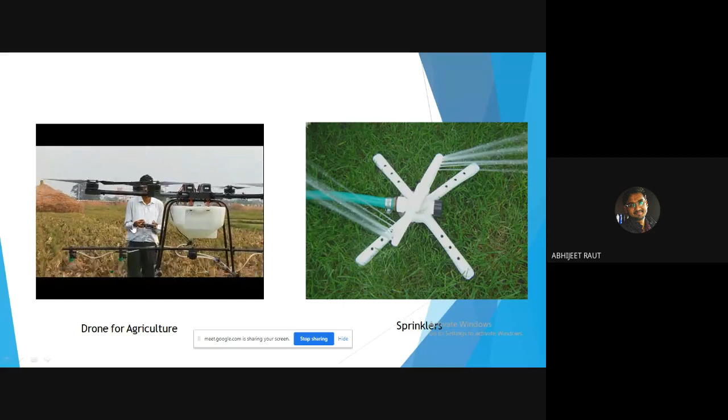See the drone in hilly areas; this drone can be used for spraying or anything. All those parts are made with the help of a 3D printer, and can be used for spraying in tribal or rural areas. One kid from Podar Convent, Nagpur, approached me for developing those parts. He has developed a quadcopter, in I think fourth or fifth standard.

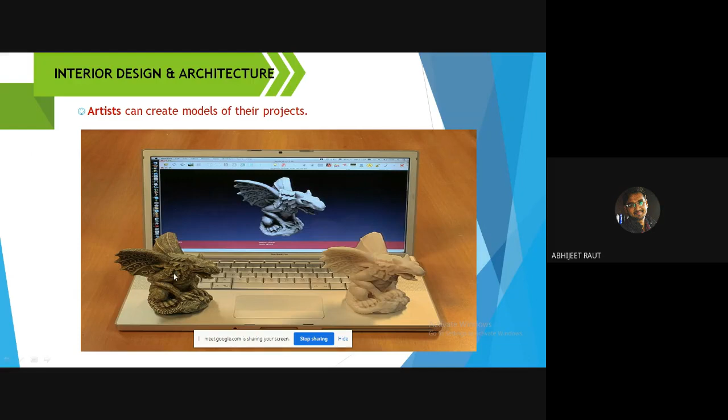I guess such types of dragons can be made. In interior, I told you I'd been invited to LED college, interior designing, fashion designing, even architecture. With the help of scanning, as I told you, unique things we can replicate. Just take a scan of it, and you can create a replica of that unique thing. Even in architecture, initially there were naksha maps, right? But now we can create those things in 3D format to give better visuality.

As I told you, conventionally we can't develop those things, right? Conventionally complex shapes नहीं बना सकते थे carpentry से, let's say. This is the beauty of 3D printing, that such complex and beautiful shapes we can create with the help of 3D printing. See this. Even the footwear industry, Nike, Adidas, even you can create your own sandal with the help of 3D printing.

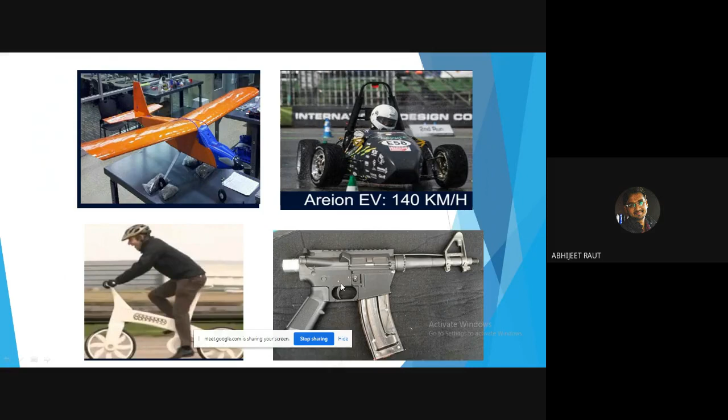If you are updated with current affairs, one year ago the USA banned this 3D printed gun. Why? Because you can create your own gun. STL files are available on the net, and you just require the gunpowder. This is the major disadvantage. You don't require a license for it.

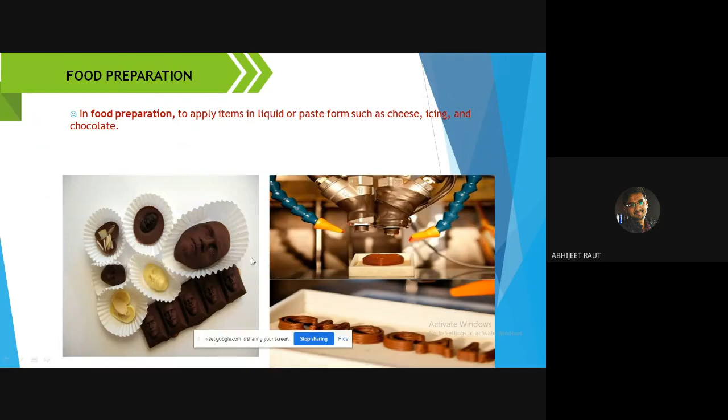Okay, for food, there is the chocolate printer. Even in Mumbai, there is a cafe printing cups by 3D printing technology, additive manufacturing. They serve you a cup which is edible. Even now there is an advancement for space: you can't ship any tools or small equipment required, you can't courier to an astronaut on the moon or Mars, right? So 3D printers are dedicatedly developed for Mars as well.

I told you about 3D scanning, right? We store happy moments in 2D form, photographs. But see the beauty of 3D printing. You can create your 3D figurine or 3D selfie with the help of 3D printing. You can store that moment in three-dimensional form now. This is popular in metro cities. That is it from my side.

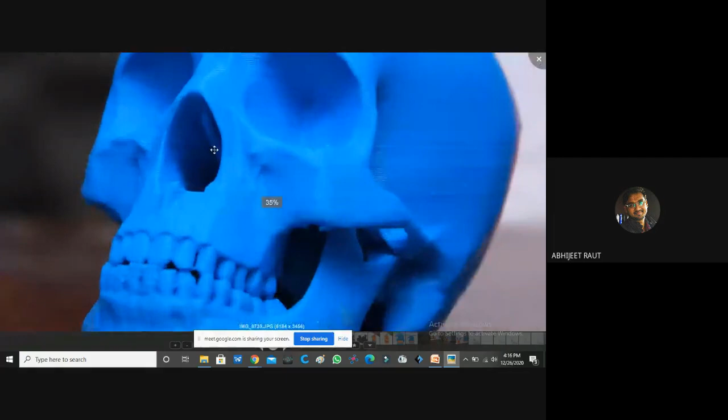Okay, see this. This is developed with the help of 3D printing for a maxillofacial case; we have shown the skull. You can see the irregularity with FDM. These are the layers, visible layers. The surface finish is not good. This is developed with the help of an FDM 3D printer. Observe it.

So this is developed with the help of FDM. This is for one of the architecture clients. Customized gifting for Christmas. This is a Christmas calendar we have done for one of the customers.

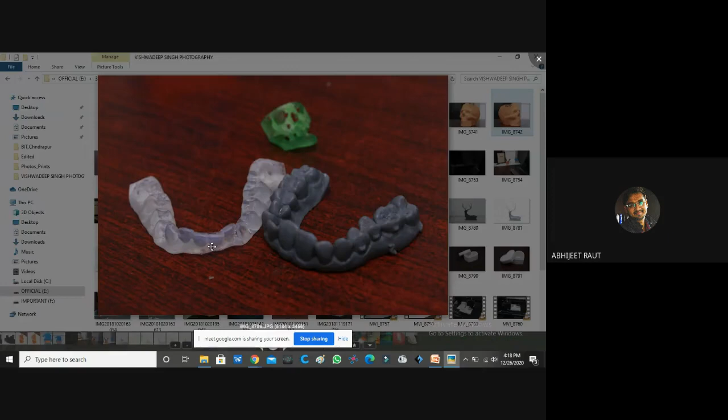This is developed with the help of SLA. You can see the minute, micro-level detail, the small deer you can observe. This we have developed with the help of resin-based 3D printing, SLA, gray resin and clear resin. This is a customized part; as per your required shape we can develop it.

This is a 3D statue developed by me on an FDM 3D printer. Accuracy is not that much, you can see. This is a resin 3D printer. You can see glimpses. So that was it. Even this is the process. You can observe this process.

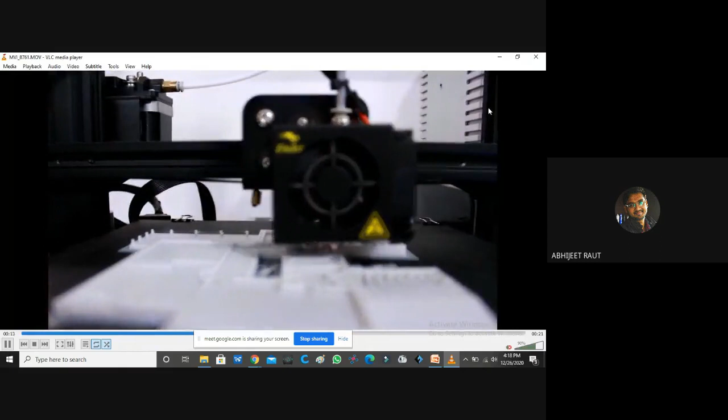This is a small DIY 3D printer. You can see. In that version it works. There are the nozzle and fan. Okay, Abhijit sir, that's from my side.